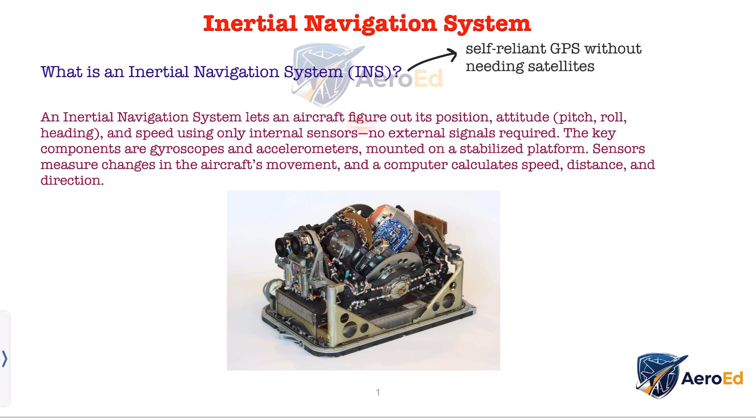So now we know that INS lets an aircraft figure out its position, attitude, heading and speed using only internal sensors. So now we will see how the INS works. INS uses Newton's laws of motion to track movement accurately. Accelerometers measure acceleration in specific directions. We know that acceleration, when integrated, gives velocity, and when it is double integrated, it gives us distance traveled.

Alright. So by knowing the starting location or the takeoff location, the computer can keep updating the aircraft position in latitude and longitude. So let me break this down for you. The inertial navigation system uses Newton's laws. Accelerometers detect accelerations along north-south, east-west and vertical axes. And we know that if we integrate acceleration, we get velocity. And if we again integrate velocity, we get the distance traveled.

So what are accelerometers? Accelerometers are sensitive pendulum-like devices that swing when the aircraft changes speed. So you can imagine a pendulum. Whenever the aircraft changes its speed, the pendulum swings. Their movement is converted to electrical signals representing acceleration, which are further processed to get velocity and distance data. So when the pendulum swings, the movement is converted to electrical signals which represent acceleration.

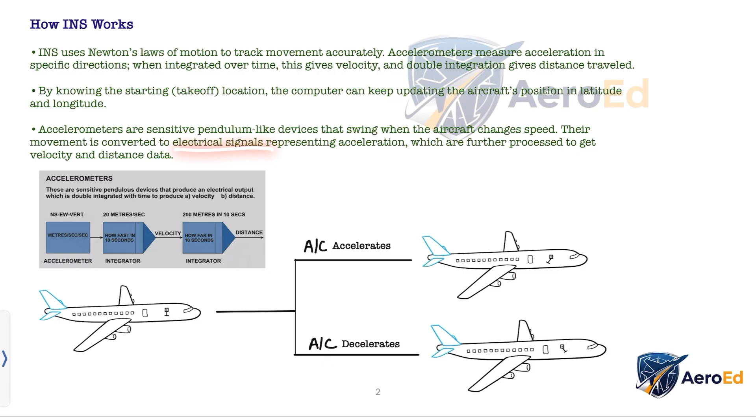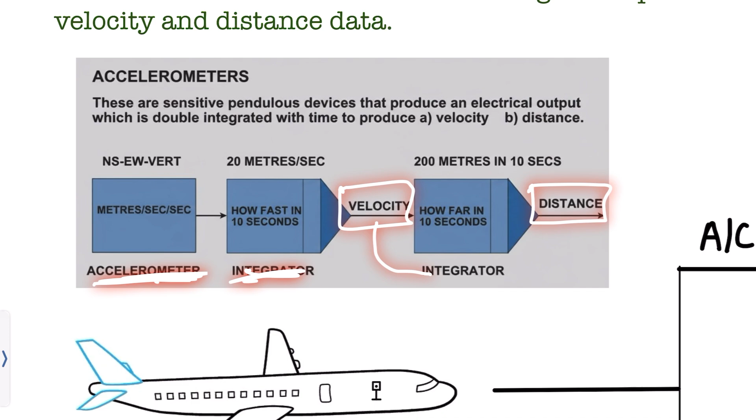And you can see here also that when acceleration is integrated, we get velocity, and when velocity is integrated, we get the distance traveled. You can see from the image the movement of the pendulum when the aircraft accelerates and when it decelerates. The movements are sent via electrical signals which represent the acceleration, and by integrating we get the velocity and the distance. Alright. So now we are going to study the main parts of the INS.

Before, I said the INS contains gyroscopes, accelerometers and has a stable platform. We have already studied accelerometers, which measure changes in speed along north-south, east-west or sometimes vertical axes. But what is the use of the gyroscope? We know that we need a stable platform, right? So the use of the gyroscope is to keep the platform level and stable, so accelerometers only measure intended movements and are not affected by gravity or tilting. So if the aircraft tilts or rolls, the platform should stay level to get only the intended movements for the INS.

And what is the use of the gimbals? To keep the sensors level when the aircraft tilts or turns, the gimbals are used. Now we know that accelerometers give us the acceleration, but we also have to integrate to get velocity and again integrate to get distance traveled, right? So who does this? It is done by the computers, which also correct errors and display navigation information to pilots. How do the sensors stay accurate?

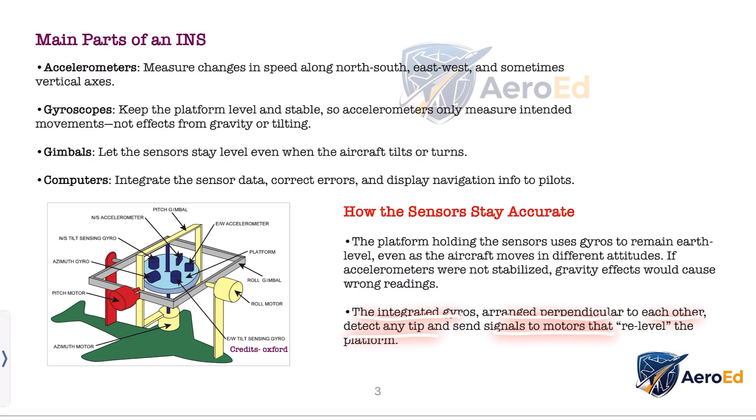The platform holding the sensors uses gyros to remain earth level, even as the aircraft moves in different attitudes. If it were not stabilized, gravity effects would cause wrong readings. So we can say that gyroscopes are the heroes which keep everything level, mounted with gimbals. They counter aircraft tilts so accelerometers ignore gravity fakes. The integrated gyros are arranged perpendicular to each other. Whenever they detect any tip, they send signals to the motors that realign the platform.

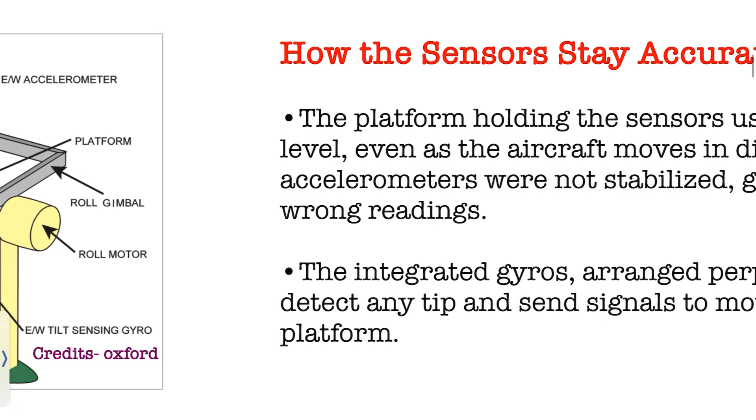So as you can see in the diagram, there is a pitch motor, roll motor and azimuth motor. Whenever the gyros detect any tip, they send signals to these motors, which realign the platform, because we know the importance of the stability of the platform.

Earth's rotation and correction. Because the aircraft flies over a rotating Earth, certain corrections are needed. We have already studied earth rate and transport rate, so there must be compensation or corrections. So let's read the first one, earth rate compensation. Sensors correct for the planet's spin with adjustment based on latitude.

Next one is transport rate compensation. Sensors also consider the aircraft's movement over the curved earth. Extra corrections fix errors from the centrifugal and Coriolis effects as well as the Earth's slightly non-spherical shape.

So let me explain. Flying over a spinning, curved Earth, the INS has to compensate. Earth rate fixes planetary spin and transport rate handles the path over the globe. And there are some additional fixes, like Coriolis and centrifugal forces and the Earth's shape, which is not perfectly round. So to keep the errors low, corrections are made. This teamwork ensures pinpoint accuracy mid-flight.

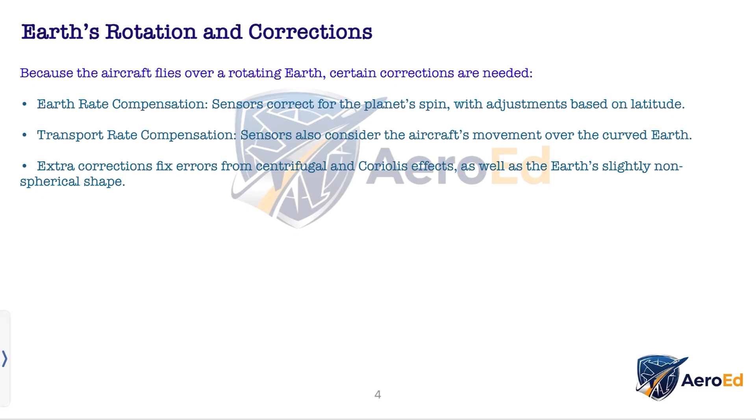Next, we are going to study initial alignment before use. We have to have an initial alignment before we use the INS, because aligning the sensors before flight is crucial for accuracy, because we know how important it is to keep the platform stable and level, right? So the system first levels the platform to make sure accelerometers sense zero gravity errors, because it should only be sensing the movements which are from the aircraft and not due to gravity.

The platform must be oriented to true north via gyrocompassing, which is a process that uses the gyroscope to lock onto Earth's rotation. There are several steps that you have to learn. First one is warming up, then coarse leveling and alignment, then fine leveling and gyrocompassing, which takes a few minutes in total.

Next, Schuler's principle. The Schuler tuning concept keeps the inertial platform aligned with the local horizon, factoring in the Earth's curvature. Feedback signals help the system remain properly leveled even as the aircraft accelerates in different directions. If it is misaligned, the system naturally tries to correct itself over a period of approximately 84.4 minutes, which is the Schuler period. So in short, Schuler tuning mimics the Earth's curve. It is self-correcting over 84.4-minute cycles to stay horizon aligned.

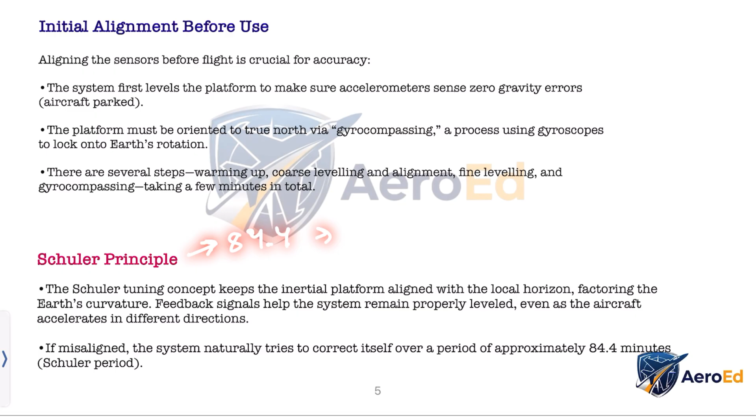Now we are going to study the types of INS errors. There are two types of errors, bounded errors and unbounded errors. Let's talk about bounded errors first. These build up and disappear within the Schuler cycle, which is 84.4 minutes, so they are for a short period of time. They are mostly due to the platform being unlevel at start, accelerometers measuring inaccurately, and calculation errors in integration steps. So you have to learn these points, alright.

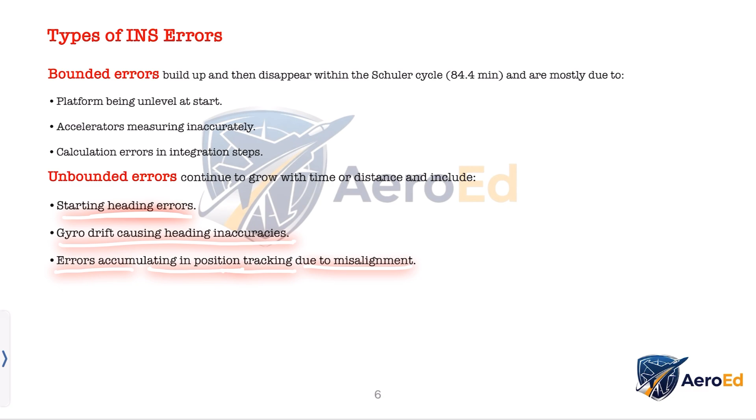Next we are going to talk about unbounded errors, which continue to grow with time or distance and include starting heading errors, gyro drift causing heading inaccuracies, and errors accumulating in position tracking due to misalignment. So you have to learn these points.

Applications and modern developments. INS provides all critical navigation data to autopilots, flight directors, or pilots who are manually flying the aircraft. Modern versions may include laser gyros and IRS, which is inertial reference system, for even greater accuracy and reliability. The inertial reference system uses laser gyros, which provide next-level precision. INS is prized for being self-contained because it doesn't need any outside sources like radio aids or satellites, making it robust in environments where these sources aren't available, like in bad weather or in remote areas.

Now we are going to compare INS with other systems. INS does not rely on external references like GPS or radio beacons, making it highly independent. However, it can be combined with other navigation methods like GPS or DME for error correction and best performance. Combining the INS with navigational aids like GPS or DME makes it more accurate and advanced.

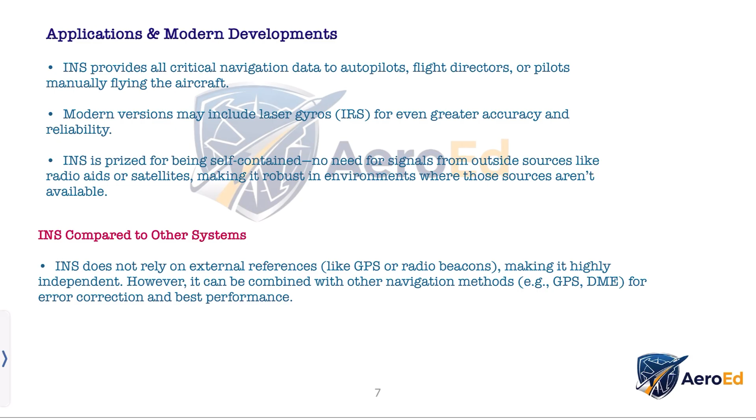This is the last part of the video, advantages and disadvantages. Let us look at the advantages first. It is precise and self-sufficient navigation. It does not rely upon other systems. It works anywhere, anytime, regardless of weather or signal availability, which makes it self-sufficient, right? It gives continuous updates on position, speed, attitude, heading and more.

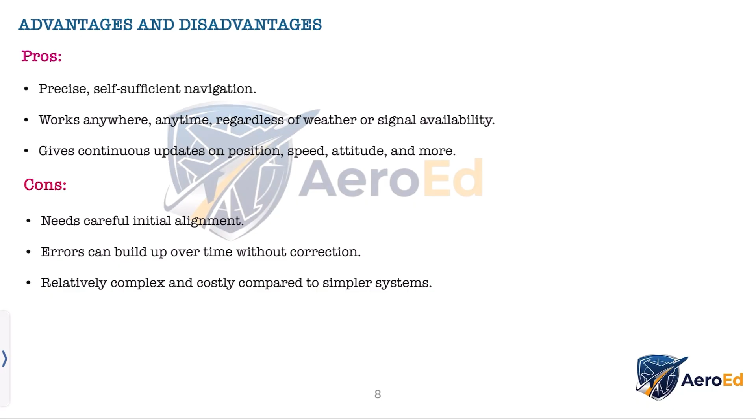Now let's look at the disadvantages of the INS. It needs careful initial alignment. We already know this. Errors can build up over time without correction, so we are talking about the unbounded errors, right? And it is relatively complex and costly compared to simpler systems. These are the disadvantages of the INS. So this is the end of the chapter.